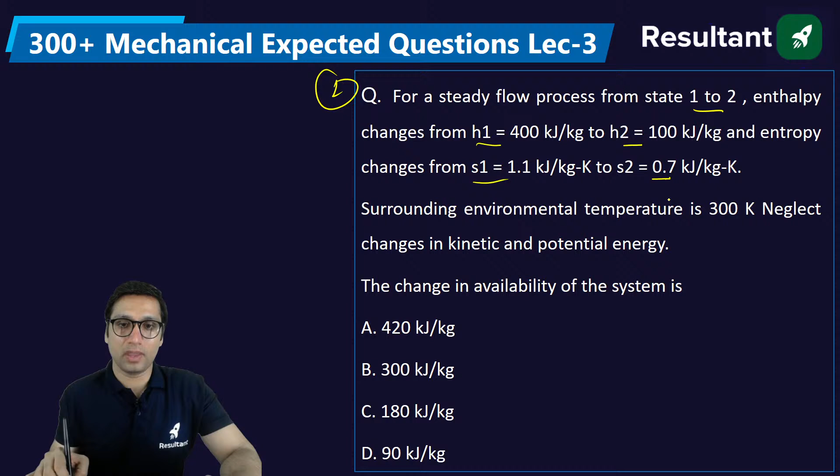Question number 1. For a steady flow process from state 1 to state 2, enthalpy changes from H1 to H2 = 100 and entropy changes from 1.1 to 0.7. If the surrounding temperature is 300, neglecting the change in kinetic and potential energy, what is the change in availability? First of all, what is the meaning of change in availability? The change in availability is, change in availability.

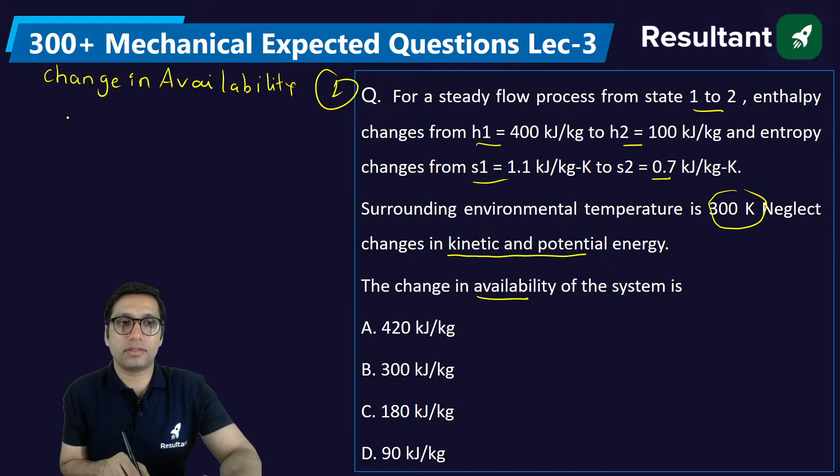What is the meaning of change in availability? It is basically equal to maximum useful work. Change in availability is also called maximum useful work. For a steady flow process, the maximum useful work is given by H1 minus H2 minus T naught of S1 minus S2. By using this equation, you can find the value of the maximum useful work, which is the change in availability.

So here they have given already 400 minus 100, these values are given, just put these values. T naught is the surrounding temperature. S1 and S2 is also given, 1.1 minus 0.7. If you solve this, you will get 180 as the value.

Are you all getting this value, 180? Yes, come on guys, just 5 students, great number. I think if this is the percentage of students whom I have taught so far, just 5 students live in the session, great number. I am so impressed, guys, so much impressed.

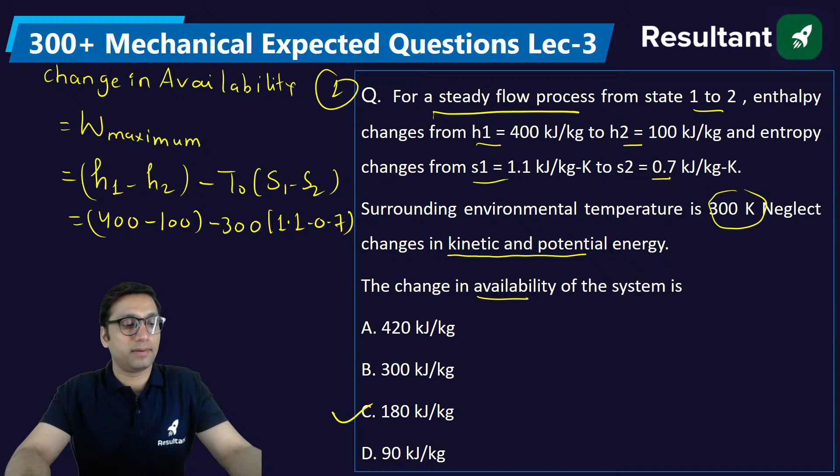Yeah, just a second. Okay, next question, going to next question.

In a simple impulse turbine, the nozzle angle at the entrance is 60 degree. What is the blade speed ratio for maximum diagram efficiency? Simple impulse turbine is also called a De Laval turbine. For a De Laval turbine, the nozzle angle at the inlet is equal to 60 degree.

What is the blade speed ratio for maximum diagram efficiency? First of all, what is blade speed ratio? Blade speed ratio of an impulse turbine is equal to the ratio of the blade speed to the speed of the jet, which is equal to cos alpha by 2 for maximum blade efficiency. For maximum efficiency of the blade, this is equal to cos alpha by 2.

So blade speed ratio is equal to cos alpha by 2, and alpha is given to you, that is cos 60 degree by 2. If you know the value of cos 60, which is 0.5, divided by 2, that is 0.25. So the right answer for this question is option A, 0.25. I hope all of you have got the answer. Remember this concept, remember this formula: cos alpha by 2 is the value of blade speed ratio for maximum efficiency of a simple impulse turbine.

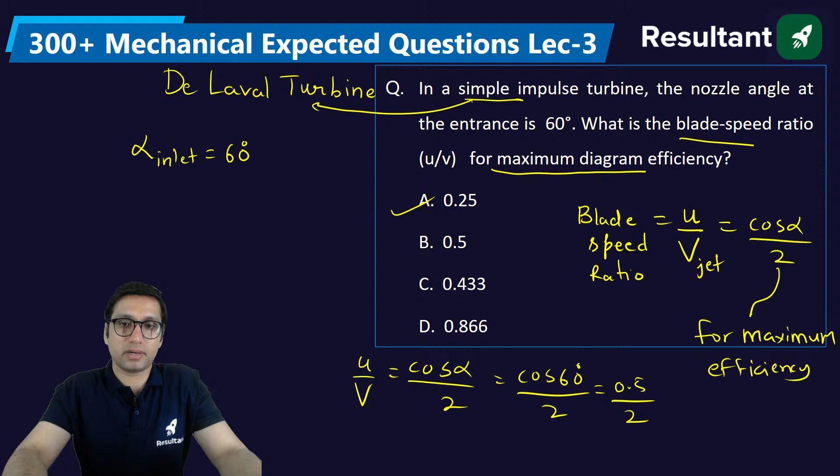Next question. If the sum of whirl components of the velocity at the inlet and outlet of a De Laval turbine is found to be 1200, and the mass flow rate of the steam is 15 kg per minute, then the tangential force acting on the blade is? What is meant by tangential force? As you know, they are talking about a simple impulse turbine, also known as De Laval turbine.

For a simple impulse turbine, De Laval turbine, the tangential force which will be acting is equal to mass flow rate into VW1 plus VW2. Just put the values, you will get the answer. Mass flow rate is 15 kg per minute, so divide by 60, into the sum of the whirl velocity, which is already given directly, 1200. So 15 by 60, solve it, you will get 300 Newton. So the right answer will be option C, 300.

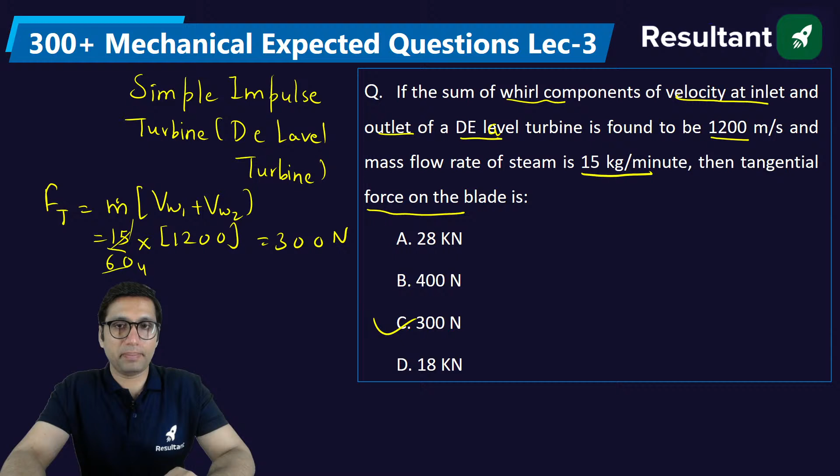So this is how you will be able to solve the tangential force on the blade in the impulse turbine.

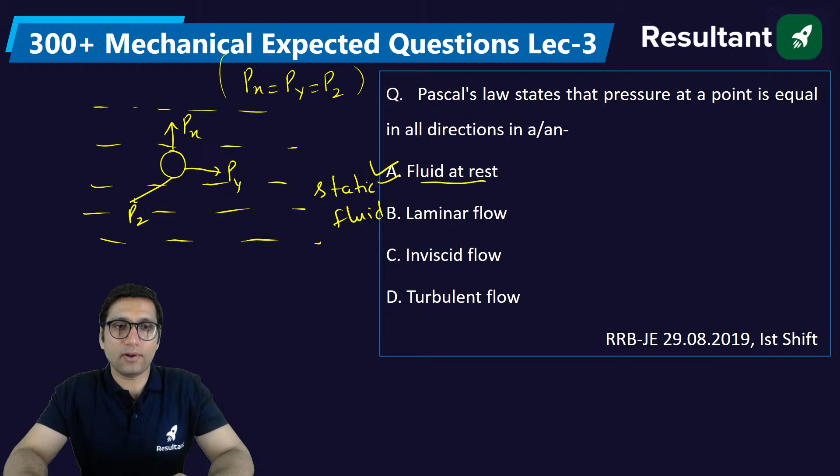Pascal's law states that pressure at a point is equally transmitted in all directions. Suppose there is a static fluid. Do you know what static fluid is? The fluid at rest. For a static fluid, consider a fluid particle - the pressure imparted on it in the x, y and z direction is the same, that is equal. So for any molecule in a static fluid, fluid at rest, Pascal's law states that the pressure at any point in a static fluid is equally transmitted in all directions. That is your Pascal's law.

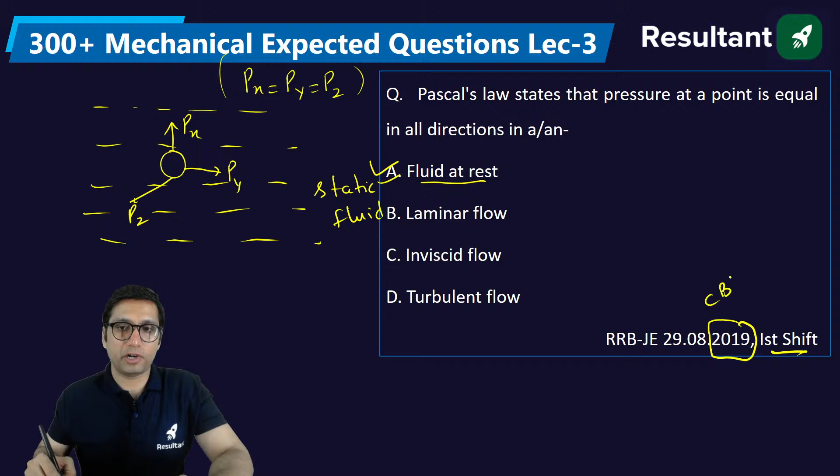This question came in 2019 of RRB JE, shift 1. Obviously we are talking about CBT2 of RRB JE. So that is important.

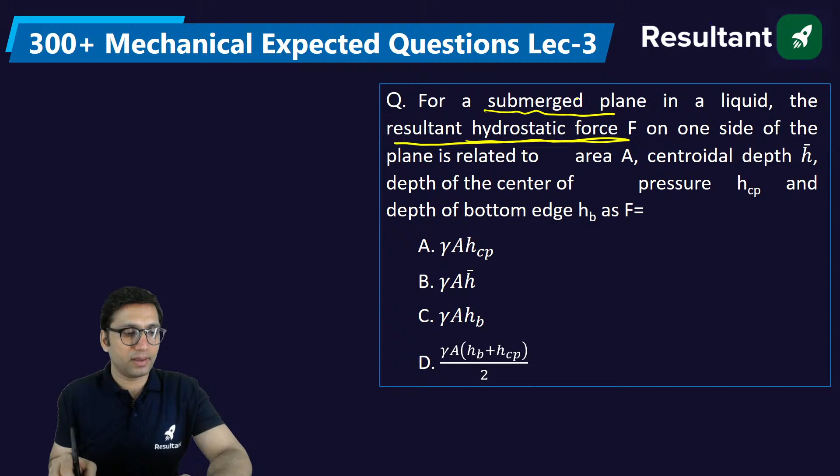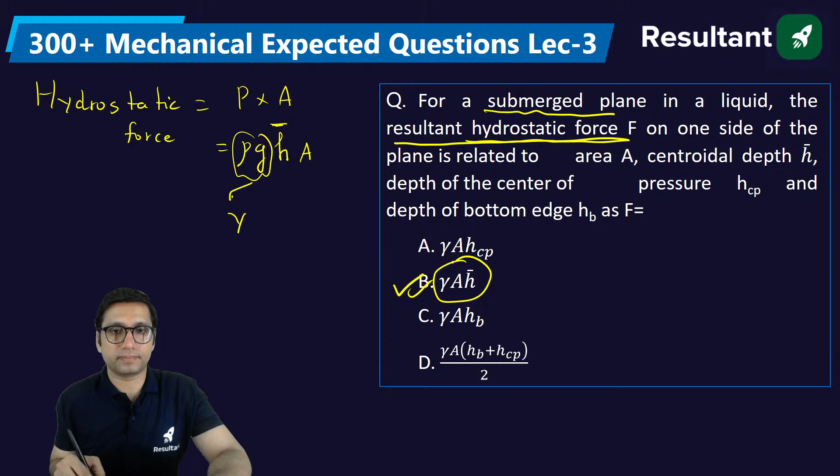Next, a pitot static tube is used to measure the velocity of water in a pipe. The stagnation pressure head is 6 meter and the static pressure head is 5 meter. You have to determine the velocity of flow from the pitot tube. A pitot tube is a glass tube bent at 90 degrees. Its purpose is to find the velocity of fluid in a pipe or open channel.

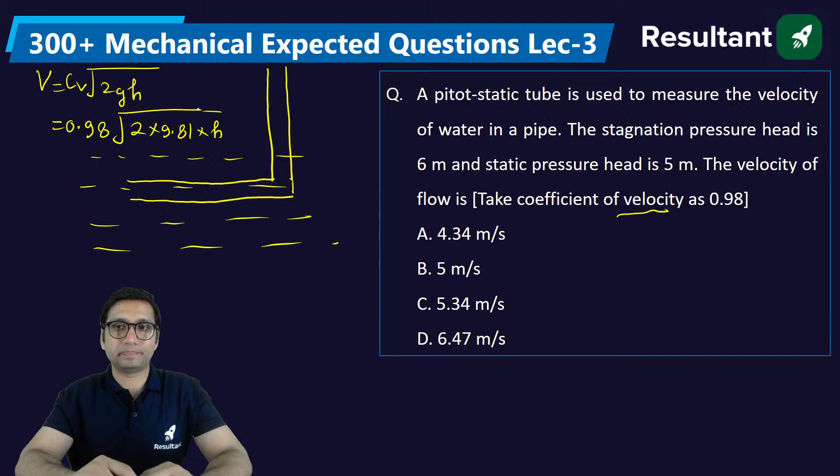The pitot tube gives velocity equal to under root 2gh. But if coefficient of velocity CV is given, it is CV under root 2gh. CV is given as 0.98, so velocity equals 0.98 square root of 2 into 9.81 into h. Now what is h? H is the difference between stagnation pressure head (total head) minus static pressure head, that is 6 minus 5. So velocity equals 0.98 square root of 2 into 9.81 into 6 minus 5. Solve it and tell me the value you are getting.

Everyone, try to solve this question and get me the answer. It will be 4.34. The right answer will be 4.34. I hope all of you have got this value.

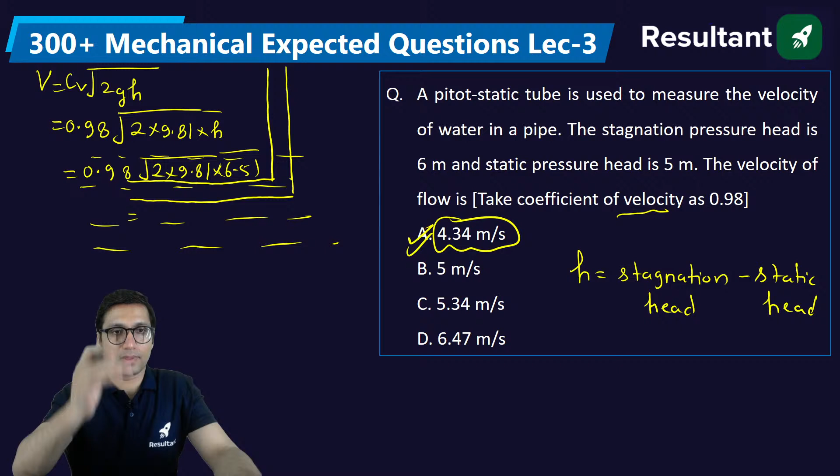Okay, very good, next question. The shear stress developed in a lubricant oil having viscosity of 9.81 poise filled between two parallel plates which are 1 centimeter apart and moving with a relative velocity of 2 meter per second. So basically there are two parallel plates having a relative velocity of 2 meter per second, with a distance of 1 centimeter between them.

Relative velocity is 2 meter per second and distance dy is 1 centimeter, that is 0.01 meter. Dynamic viscosity mu is 9.81 poise, which is 0.981 Pascal second. You have to find the shear stress using mu du by dy, applying Newton's law of viscosity. Mu is 0.981, du is 2, dy is 0.01. Solve it and you will get the answer using Newton's law of viscosity.

So you will get... just a second. I think there's a mistake. It is coming out to be 196.2 Newton per meter square. So either there is a mistake of some decimal places. Are you all getting this value, or have I done some mistake? 196.2 is coming, I think there is some mistake, either here somewhere. There can be some mistakes, like either this should be 20 or this should be 10 centimeter, or this should be 98.1 Pascal second, because the answer is coming out to be 196.2 Newton per meter square, not 19.62, so there is definitely some mistake somewhere.

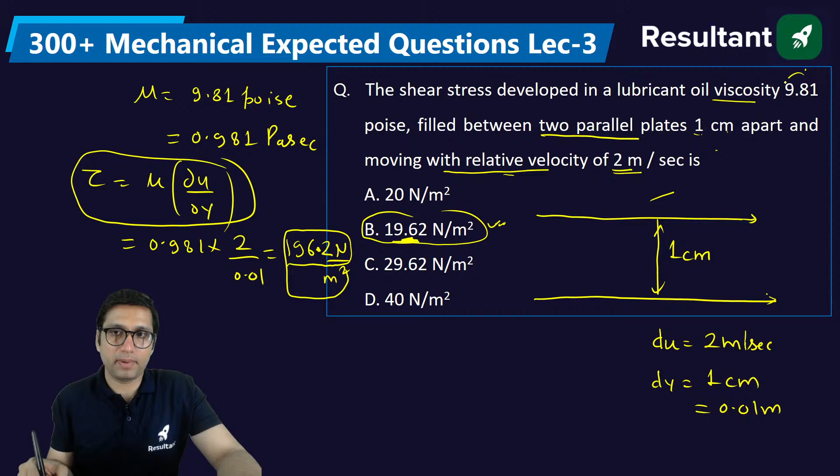An engine at full load delivers 200 kilowatt of brake power. It requires... so what can I do in this question? Nothing, you just remember this formula. If the values are correct, you will get the right answer. An engine at full load delivers 200 kilowatt of brake power, it requires 25 kilowatt to rotate it without fuel at the same speed. The mechanical efficiency at half load is asked. First of all, the concept part.

At full load, the brake power is given as 200 kilowatt. It requires 25 kilowatt to rotate without fuel at the same speed. This is known as friction power. How much power is required to rotate without fuel at full load, at the same speed, that is called friction power. So basically they are talking about friction power right now.

So this is friction power. They have to find mechanical efficiency.

Now, the problem is you don't have to determine mechanical efficiency at full load, but at half load. What happens at half load? When the load is reduced to half load, the brake power becomes half, that is 100 kilowatt.

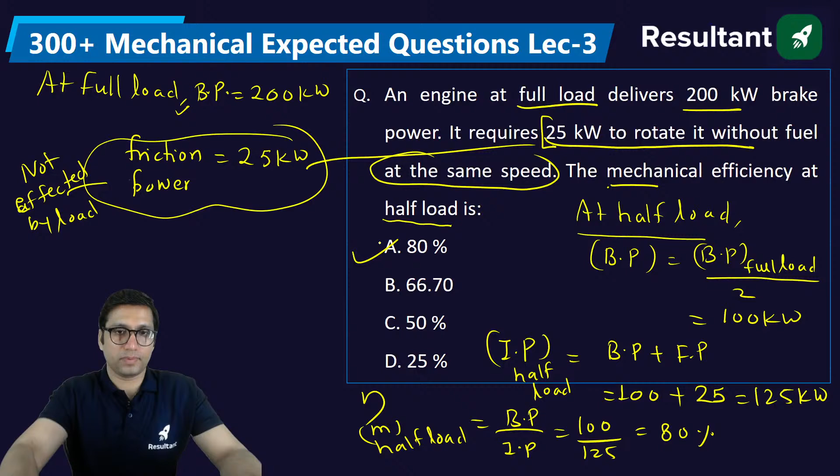While calculating the specific enthalpy of the wet steam, which of the following quantity is of no use to us? When we calculate the specific enthalpy of the wet steam, see, wet steam is in which region? This is a region of wet steam.

So for calculating the specific enthalpy of wet steam... don't know what's the problem with my connection.

So calculate the specific enthalpy. What is the formula for specific enthalpy of the wet steam? It is equal to specific enthalpy of the saturated liquid plus dryness fraction into specific enthalpy of vapor minus liquid. You can use this formula, but in this formula you don't require the value of specific volume.

Do you require specific volume? No, it is of no use to us. So the right answer will be, just a second.

Is there some network issue, internet issue? Just a second, let me check. Yeah, is it fine to everyone? Or is there some problem with the internet? Just a second. Looks like there's some problem with the internet, it is connecting and disconnecting.

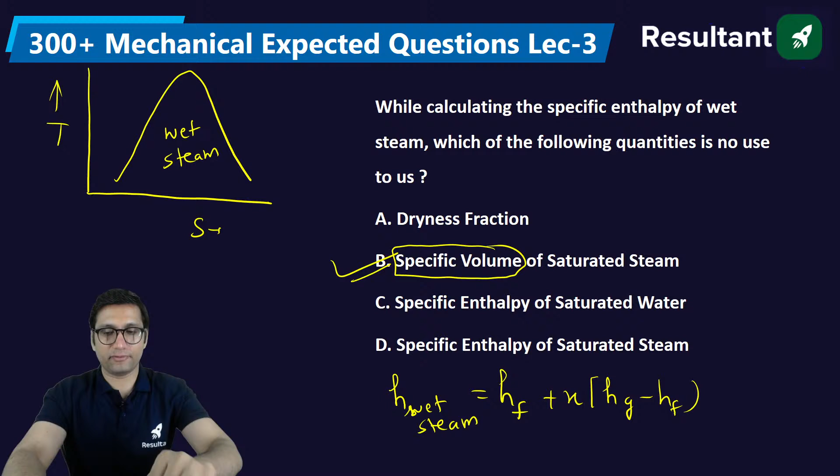Next question. A discharge of 90 liter per second is obtained from a centrifugal pump, which has 20 meter per second tangential velocity at the outlet against a net head of 15 meter. If the manometric efficiency of the pump is 80%, then the approximate velocity of whirl at the outlet of the pump will be.

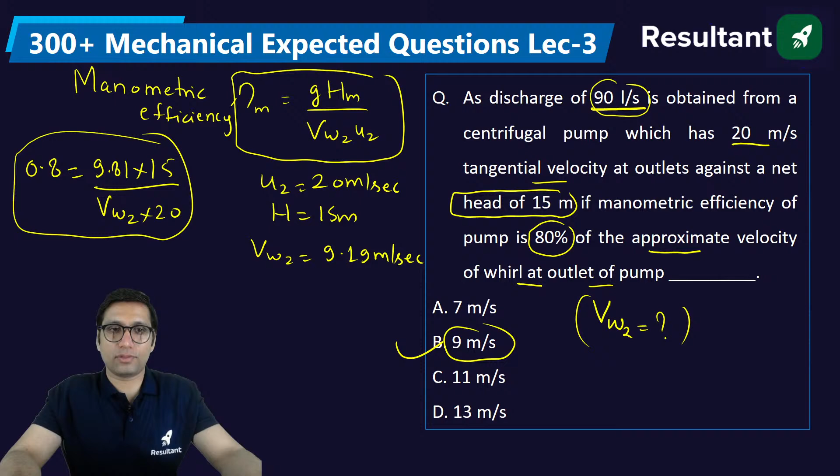Where is Kuldeep? Yeah, Kuldeep is not there. So many students are not there. I think many of the students are not following the classes. There was a reason why I have scheduled the class timing to 8 p.m., so that all types of students, whether they are in a job or they are college-going students in the final year, can all come to the classes. But seeing these numbers, 4 to 5, makes me very sad. Where have all the students gone? Where are all the students?

You have to find the specific steam consumption. The unit is wrong. It will be kg per kilowatt hour. Kg per kilowatt hour. Okay. First of all, the unit was given wrong. The formula for specific steam consumption is equal to 3600 divided by net work. What is net work? Net work is equal to work of the turbine minus work of the pump. That is the net work of a steam power plant.

Turbine work is equal to enthalpy at the inlet of turbine minus enthalpy at the exit of turbine, minus pump work, which is 50. If you solve this, you will get 3600 divided by 1150. What answer are you getting? Are you all getting this value? 3.13. It will not be exactly 3. It will be 3.13 kg per kilowatt hour.

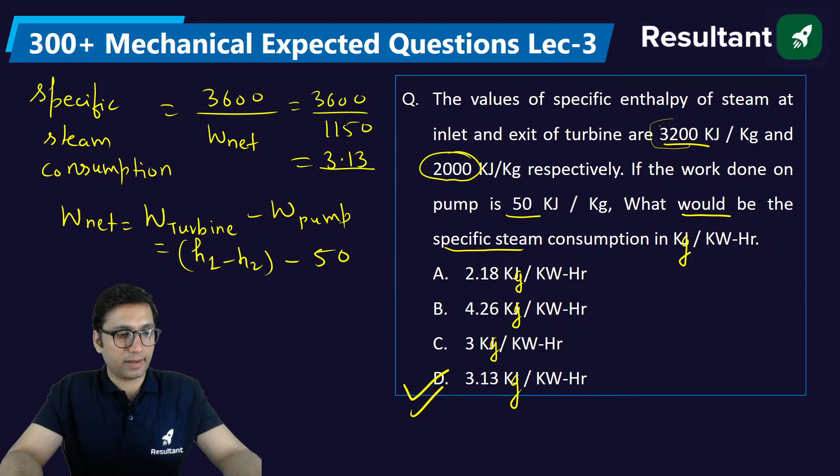Okay. Clear? Next question is, 2 moles of oxygen are mixed adiabatically with another 2 moles of oxygen in a mixing chamber so that final total pressure and temperature of the mixture become the same as that of individual constituents at their initial state. The universal gas constant is given as R. The change in entropy due to mixing per mole of oxygen is given by?

Looks like it's a very difficult question, but whenever you have to solve these types of questions, adiabatic mixing of two gases. So if there is adiabatic mixing of two gases, the final total pressure of the mixture, 2 moles of oxygen are mixed adiabatically with another 2 moles of oxygen in a mixing chamber so that final pressure and temperature of the mixture become the same as that of individual. Change in entropy due to mixing per mole of oxygen. What will the entropy change be? Yeah, mixing will definitely increase the entropy.

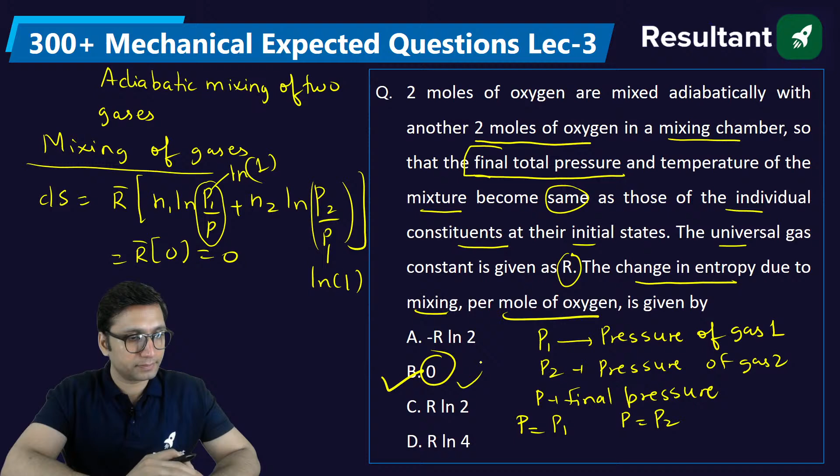This will become log 1. This will become log 1. And what is log 1? Log 1 is 0. So this will be universal gas constant into 0. This answer will come out to be 0. Clear? So that's why the answer will be 0 in this case.

What is defined as saturated steam always exists at the temperature of the boiling point corresponding to that pressure.

Okay. Steam at the boiling point, will it be wet steam or dry saturated steam? They are already saying that saturated steam always exists at the temperature of the boiling point. That is called dry saturated steam or simply saturated steam, because they are already saying it is a saturated steam. And that saturated steam which is at the boiling point will be your dry saturated steam or simply saturated steam. Okay.

A gas is contained in a cylinder with a movable piston of 100 kg mass. When 2500 joule of heat flows into the gas, the internal energy of the gas increases by 1500 joule. What is the distance through which the piston will rise? So we are having a piston cylinder device. This is a piston here. Okay, and this is a gas kept in the system.

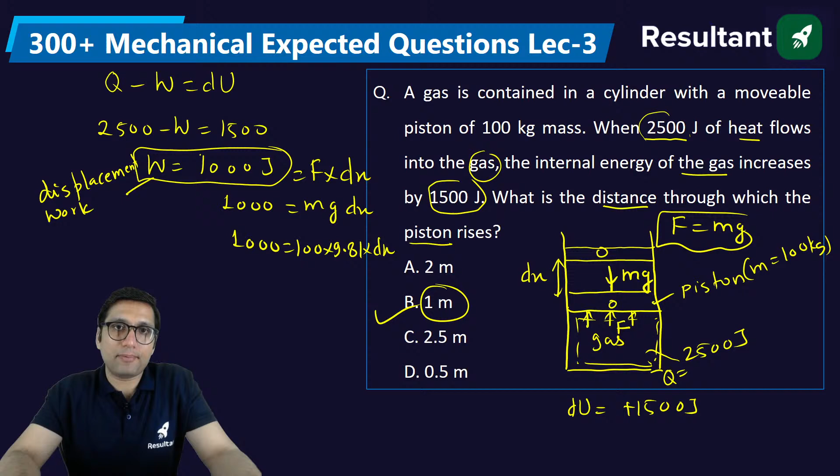A simple Rankine cycle produces 40 megawatt of power, 50 megawatt of process heat, and rejects 60 megawatt of heat to the surrounding. What is the utilization factor of this cogeneration plant?

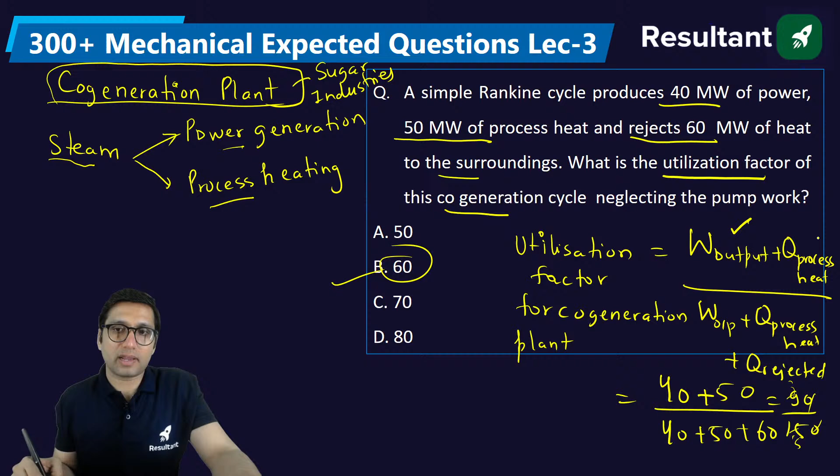There are many sugar industries also where the steam is used for generation of electricity and for process heating also. Okay, there are many examples of cogeneration plants. So for any cogeneration plant, if you have to find the utilization factor, just add the output work and process heating, and divide by the total, whatever is given.

Using an engine of 30% thermal efficiency to drive a refrigerator having a COP of 5, what is the heat input into the engine for each megajoule of heat removed from the cold body by the refrigerator? If you remember, this similar type of question we have, I think, solved in the previous session, but in that question this data was not given. Here they are asking what is this heat.

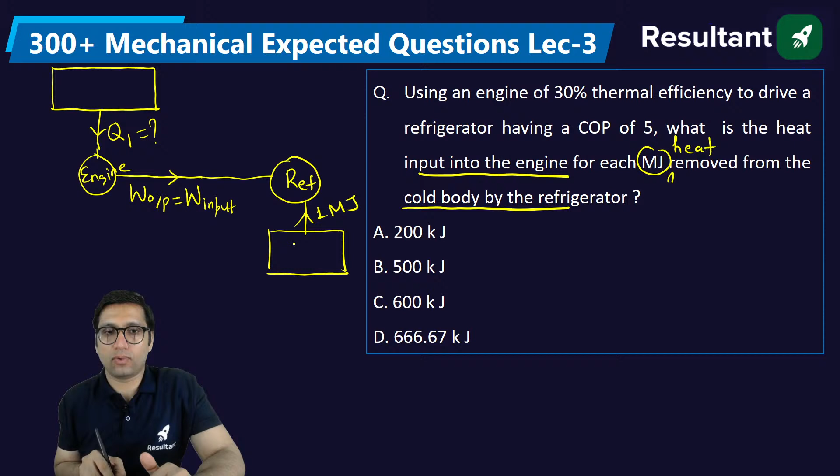Okay, now you understand this concept, that whatever will be the work output for the engine, that will be the work input to the refrigerator, and by taking this work input, the refrigerator will do what? It will take the heat from this cold body. How much heat? 1 megajoule of heat it will take from the cold body, which is at low temperature, and reject the heat to the high temperature, that is the surrounding. Okay, so the concept will be this.

Now based on this concept, they are saying 30% efficiency is there. The efficiency of the heat engine is equal to 30%, which is 0.3, which is work output divided by heat input. Heat input is Q1, so work output will be equal to 0.3 into Q1. That is also equal to work input.

Now COP of the refrigerator is equal to 5, which is equal to desired effect. What is the desired effect? 1 megajoule, which is 1000 kilojoule, divided by work input. Now work input is equal to 0.3 of Q1. So 5 equals 1000 divided by 0.3 Q1. If you solve this, you will get Q1 is equal to 1000 divided by 5 into 0.3. If you solve this, you will get 666.67 kilojoule.

Okay, are you getting this value? Tell me. Are you all getting this value? So we have solved a similar type question.

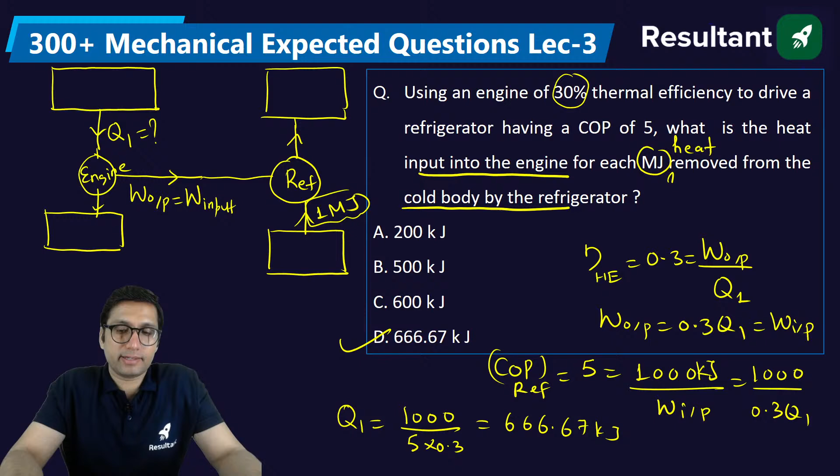In a given process of an ideal gas, work is equal to 0 and heat transfer is negative. Then for the gas, what can be said about temperature and pressure? First of all, work is 0. Will pressure remain constant? No, because if pressure remains constant, there is some work for that gas, that is pressure into change in volume. So we cannot say that pressure will be constant. Work is 0 only for a constant volume process.

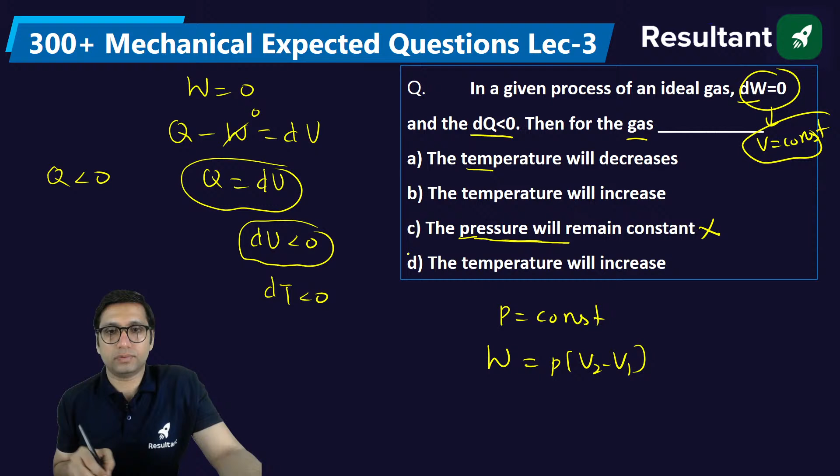So this becomes wrong. If the work is equal to 0, then according to the first law of thermodynamics, the heat transfer will be equal to change in internal energy. And if heat transfer is negative, that means the change in internal energy will be negative. If it is negative, then temperature will reduce. So temperature will decrease. Clear? So the right answer is option A.

Next question. A reversible engine exchanges heat with 3 thermal reservoirs. We have 3 reservoirs, which are represented as A, B and C. They are at temperatures of 1000, 800 and 200 Kelvin respectively. If the engine receives 500 kilojoule of heat from A and 400 kilojoule of heat from B, then what is the heat exchange from thermal reservoir C? Now this question may look very tough to you, very difficult for you to understand.

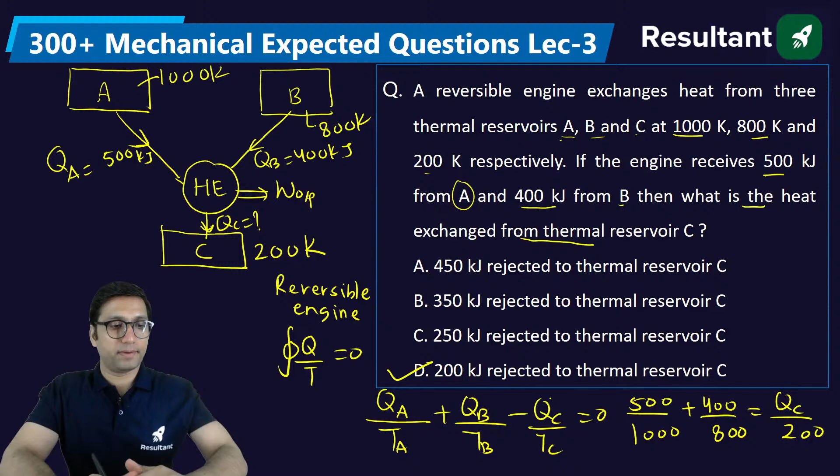Clear? Next question. An engine reversibly receives 1200 joule of heat at 900 Kelvin. After rejecting the heat to the ambient at 300 Kelvin, it develops 600 joule of work. You have to find the irreversibility in joule. So this engine is receiving the heat of 1200 joule. And this engine is at 900 Kelvin. And the ambient, that is surrounding, is present at 300 Kelvin.

One more thing is important for you to notice. Ambient means surrounding. This is the surrounding temperature. If the heat is rejected at the surrounding temperature, then the work obtained will be maximum useful work, which is exergy, or available energy, because the engine is a reversible engine. Reversibly means it is a Carnot engine, and this reversible engine rejecting heat to the surrounding will produce maximum useful work, or available energy. This available energy is equal to 600 joule.

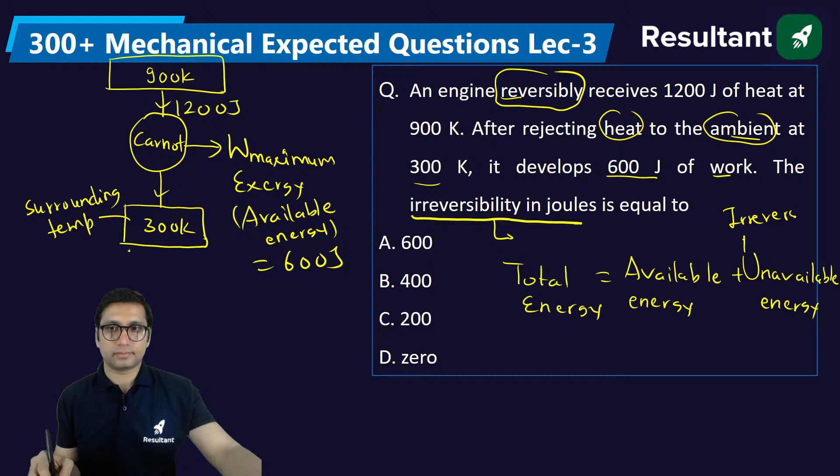Now what is total energy? The total heat, 1200 joule. What is available energy? It is 600 joule. What is irreversibility? You have to determine. That will be 600. Simple. Clear? Are you all getting this? Without using your pen also you can solve this question. Not much calculation is required. How many of you understood this question?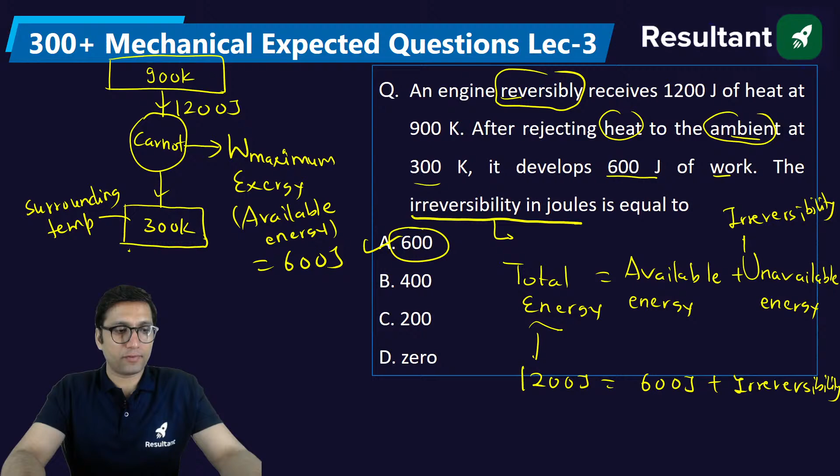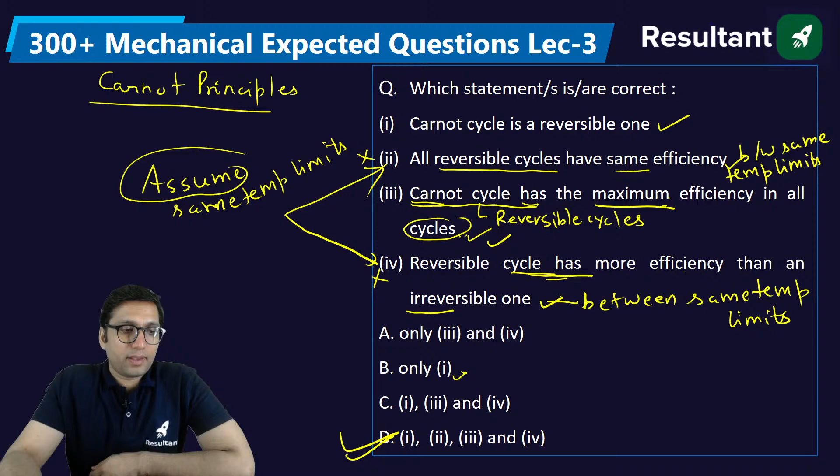Okay. So remember that there is some assumption you have to make. Why? Because if you don't make this assumption, you will not get any right answer. If you only say Carnot cycle is a reversible one, that is half correct. Okay, so we have to assume same temperature limits for these options.

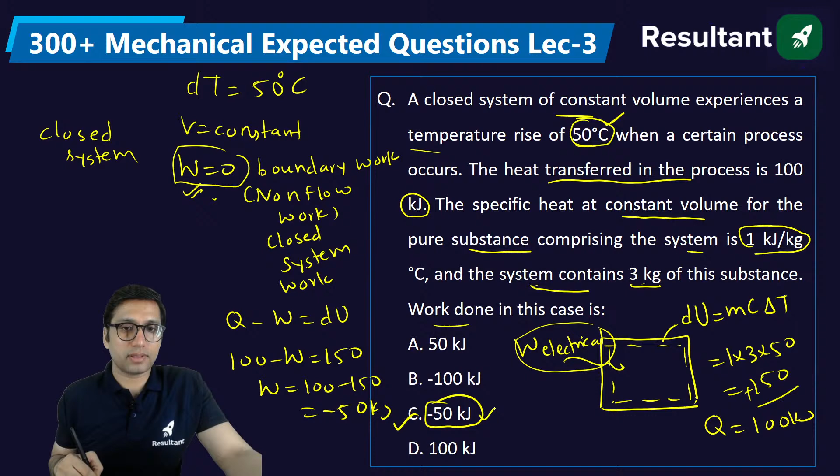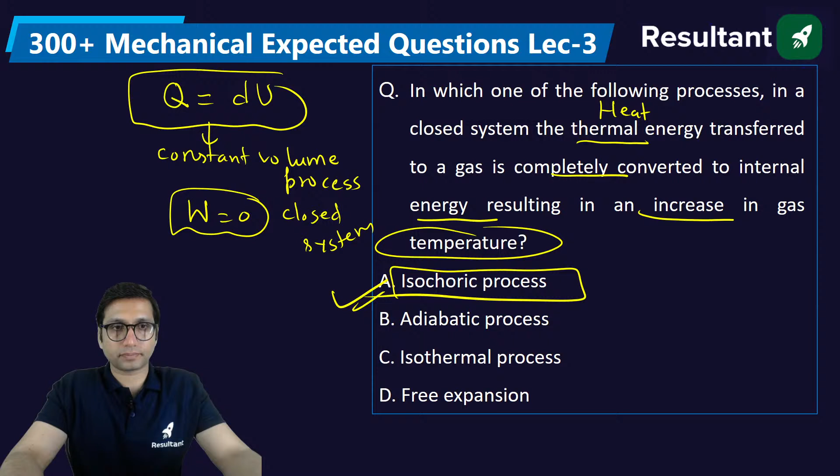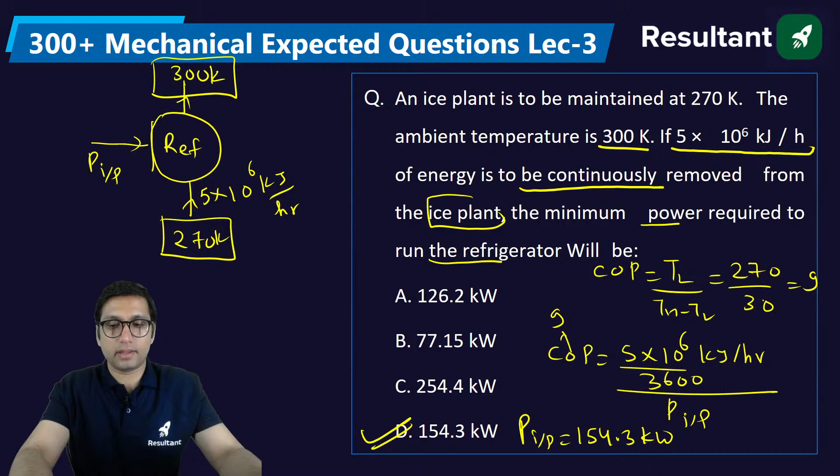Understood? Next question, last question for today's session. This is the last question.

Hello Ravi Ranjan, how are you? Good evening. I was about to say good morning. Good evening. Welcome to the session.

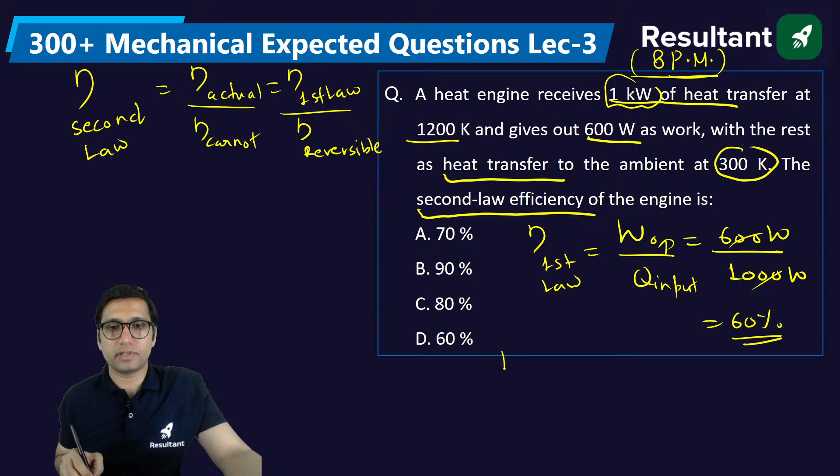Work output is 600 watt. Heat input is 1 kilowatt, that is 1000 watt. If you solve it, you will get 60%, that is the first law efficiency. Carnot efficiency depends on temperature, that is 1 minus 300 by 1200. You will get 75%. So actual efficiency is 60%, Carnot is 0.75. You solve it, you will get 80%. So 80% will be the answer.

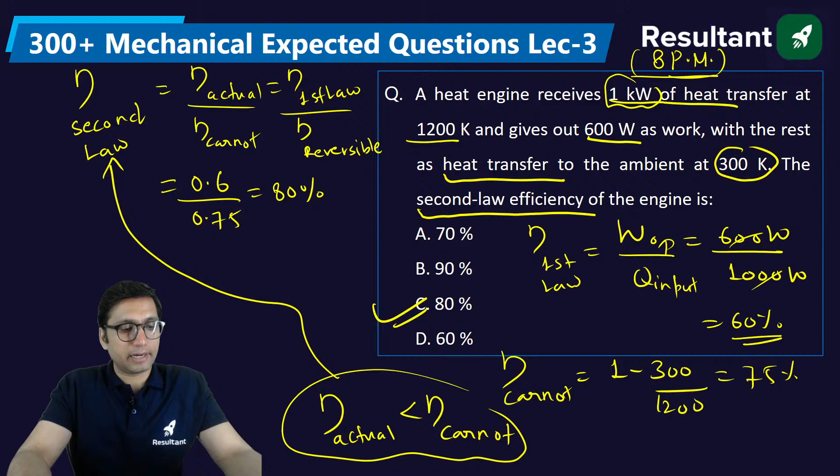And when do you use this formula? This formula is only used when the actual efficiency is less than the Carnot efficiency. Only then we use this formula of second law efficiency. In this case, you can see that actual efficiency is less than Carnot efficiency.